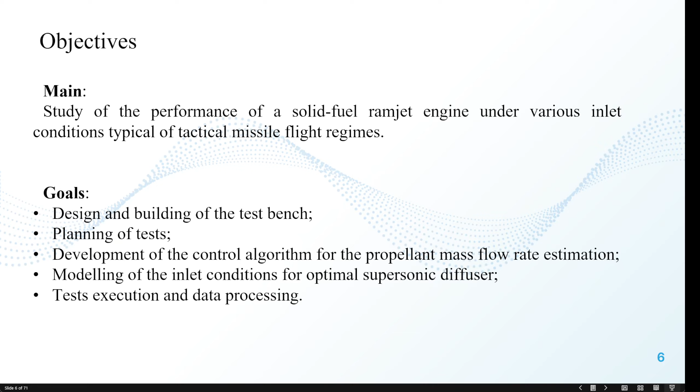Talking about methods involved in this development, we can mention analytical and experimental empirical methods of ramjet design and analysis. Empirical methods are strictly related to experimental research - these are mathematical approximations of experimental data. Analytically, we can calculate the diffuser, either an ideal diffuser or real diffuser for the engine.

Since flow must be decelerated and compressed from supersonic conditions to subsonic conditions inside the combustion chamber, we can calculate the thermodynamic cycle inside the engine analytically or by simple numerical methods. We can calculate fuel regression or fuel burning inside the combustion chamber, and we can calculate flow properties like flow modeling by methods such as area-Mach number relation or method of characteristics inside the nozzle. When we are talking about more complex processes like compressible flow, viscous flows, combustion, fluid-structure interaction, we need to involve numerical simulation - there's no other way, unfortunately, to calculate such processes.

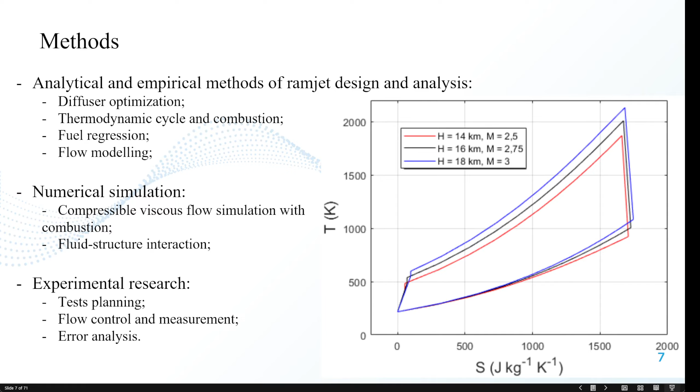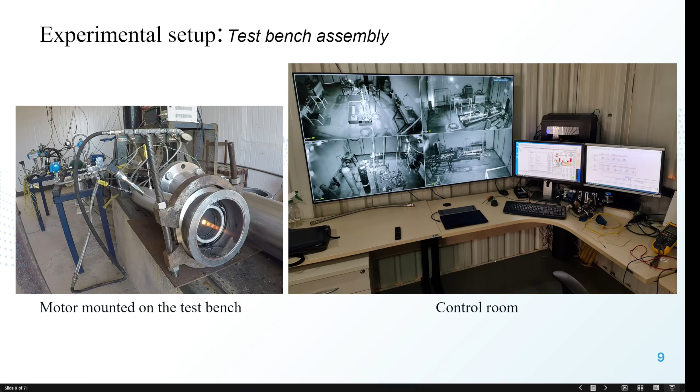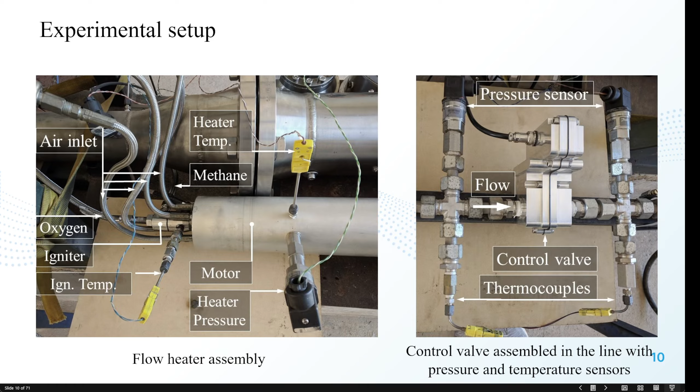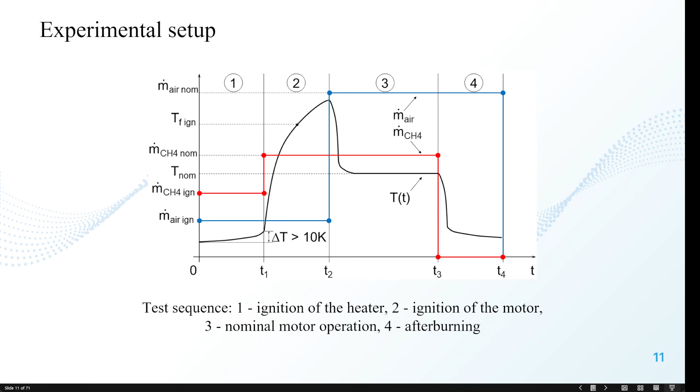I'd like to remind you that these materials I'm showing are all published in the literature, so if you're interested in some technical aspect or part of this development, I can forward you the publications on these topics.

As you can see visually, higher heating power and higher Mach result in significantly brighter flames, and fuel consumption and required thrust increase accordingly. This is because flying at higher Mach values requires much more significant thrust—kinetic energy increases with the square of Mach number, so we have to provide significantly higher thrust. Our test bench allows us to regulate mass flow rate and heating value, so we can ensure the system operates well.

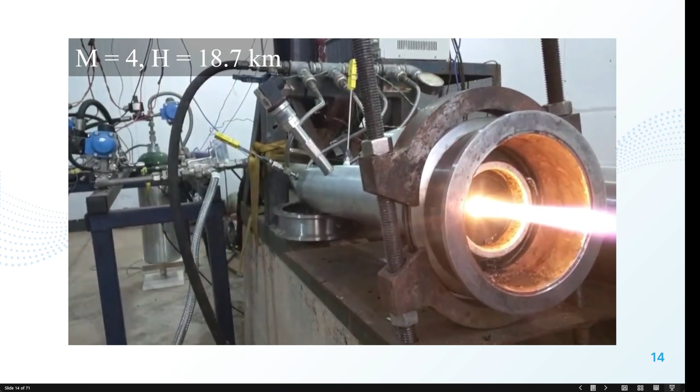Okay, this is a high power test, and as you can see, the motor was working quite interesting operation. When we provided this together with our students and colleagues, it was a lot of fun to do. This research motor is relatively small, so it allows us to change parameters fast, to adapt, and it's not that expensive to operate.

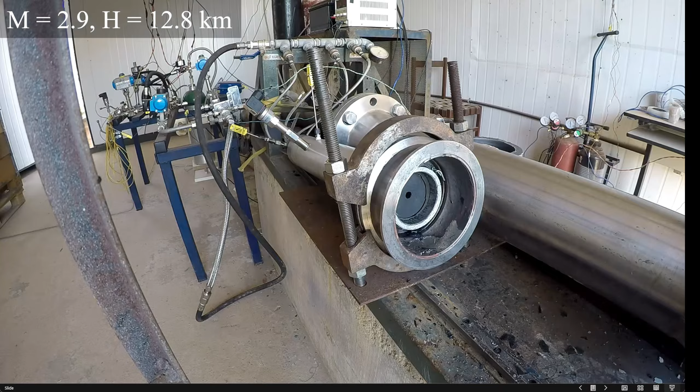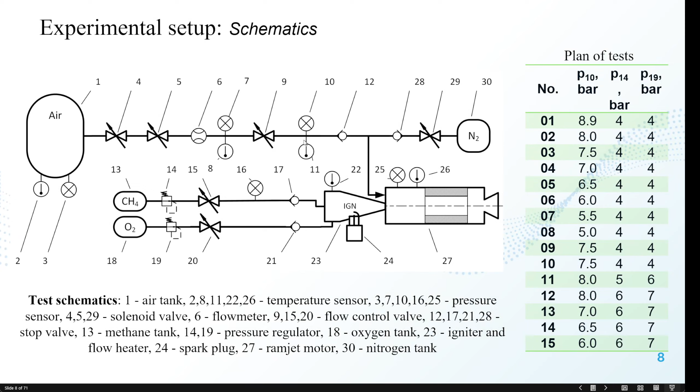As a result, we can see here some data. These are parameters on the inlet of flow in terms of pressure. Different pressures we are simulating at point 10. Just to show you where point 10 is, I think it was not really clear: point 10 is this pressure after the control valve, before the non-return valve, so this pressure which we are controlling with valve number 9.

Inside the combustion chamber, we have more or less the same pressure independent of the pressure level on the control valve, because the fuel is the same fuel grain. This means that the thermal energy provided to this combustion process is nearly the same. We are always working with excess of oxidizer, so the amount of fuel is significantly smaller than the amount of oxidizer, and fuel is...

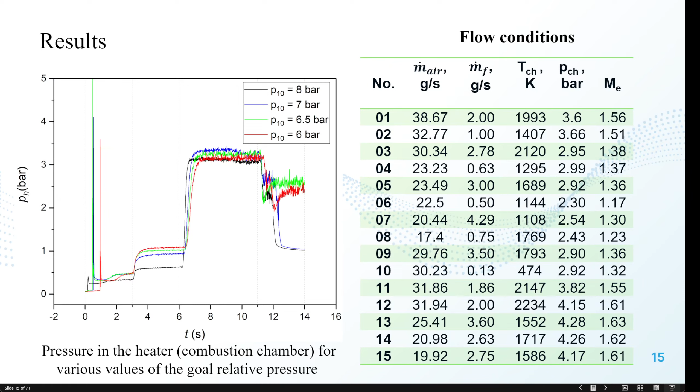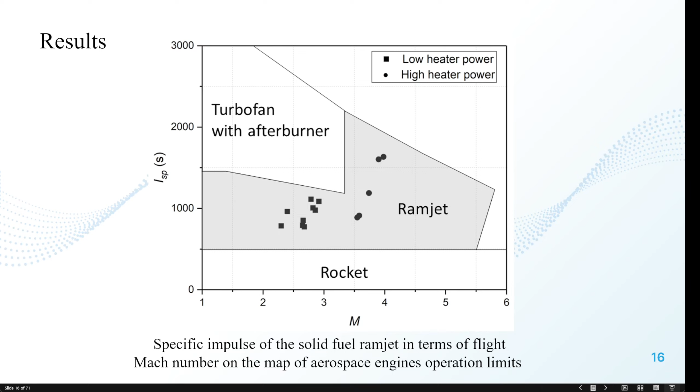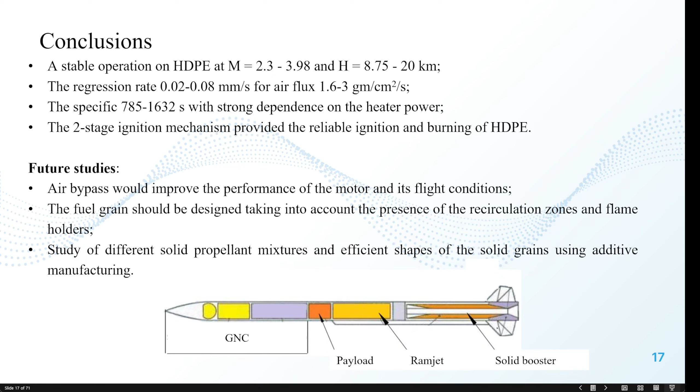Conclusions about this section are stable operation on various regimes. The regression rates were measured, the specific impulse, as you can see here for different cases, and the two-stage ignition mechanism provided reliable ignition. As the result of this part of development, we have published two really nice papers. I will show you, and if you're interested, you can find them also - they are available...

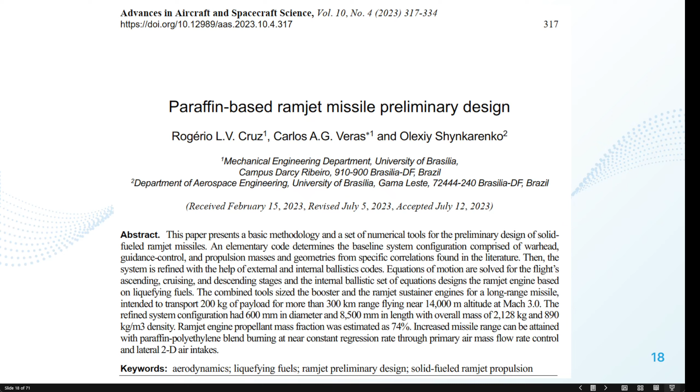...online. There is a paraffin-based ramjet missile preliminary design, which was published in Advances in Aircraft and Spacecraft Science last year. And this year, I think in November 2024, a chapter of a book was published about application development of a supersonic ramjet anti-ship missile using space standards and rocket technology. This is an extension of previous works applying our research to a real structure. So we have published the background for preliminary missile design, considering this technology of solid fuel ramjets, and I think we can quite fast provide any kind of preliminary estimation of such a device.

If you're interested in some specific aspect, I can answer your questions a bit later.

A second part of my presentation - first part of my presentation is composite 3D printed grains. I will try to pass faster through this section. This is devoted to our attempt to use 3D printing in improving the performance of the engine, in order to program its operation by using different materials along the time of engine operation.

Okay, the idea of this fuel grain was the following: that we have one surface exposed to hot flow, and the burning starts on this surface while other surfaces are protected, and they burn with time, opening more and more space for fuel burning. So with this concept, we would like to have a constant income of fuel and a constant thrust of the engine along its operation. This is quite a well-known problem, that when we are using solid fuel, especially simple geometry solid fuel like cylindrical fuel, we are constantly changing the surface of burning, and we are changing the performance characteristics, for example thrust and O/F ratio.

And with this project, we will try to keep this parameter constant using the theory of hybrid propulsion, which is quite well developed nowadays.

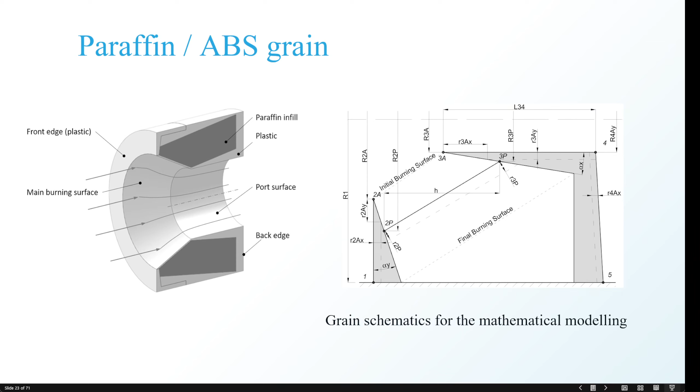We designed this fuel grain with a protection layer and tested it. According to our calculation, this fuel grain is supposed to work for around 10 seconds, burning step by step. Here you can see time and the programmed burn surface. We also did this experimentally and proved the concept. This system works, but it's not as perfect as we planned, so we will need further studies on this topic, but as an initial stage it showed quite interesting results.

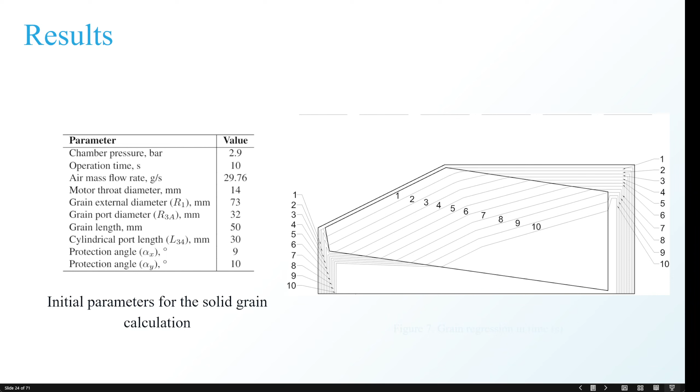It means that the amount of chemical energy provided inside the combustion chamber will stay constant, and the thrust of this engine flying at constant altitude will also remain the same.

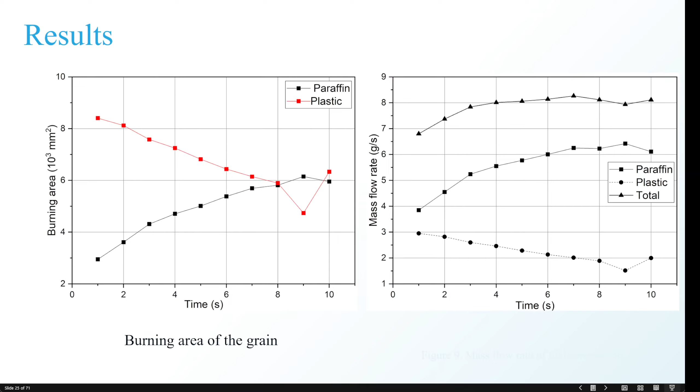We also calculated temperature inside the combustion chamber. It was something around 1060 to 1080 Kelvin, and chemical composition of combustion products over time. This is just an application of a numerical method implemented in CEA to estimate chemical composition. We did not measure this chemical composition since we have a quite reliable tool from NASA to estimate combustion. We can do it with this program.

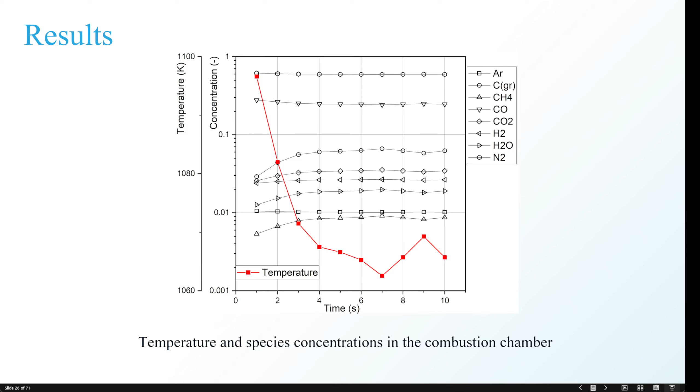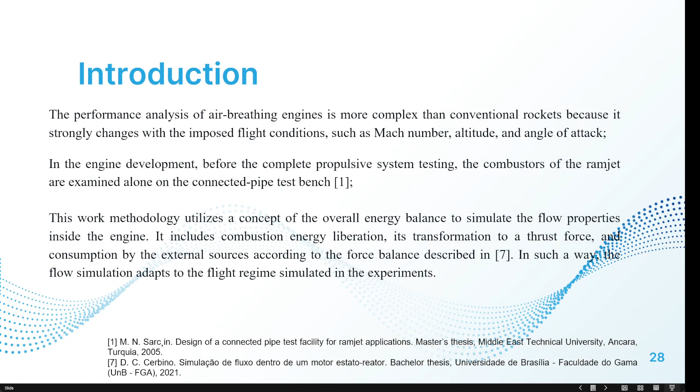Okay, the second part of my presentation is about liquid fuel ramjets. This is, I think, more important and more interesting because we have lots of results on this study. Probably I will skip the motivation. The objective of the liquid fuel ramjet was that we must have an engine working with liquid propellants.

These propellants can be stored in separate tanks, so inside the engine we will have just a combustion chamber, and we will have some simple valves, maybe a pump to supply our engine. So we can make a kind of classical ramjet engine working on liquid propellants. Of course it's a bit more complex than the solid fuel ramjet because now it has moving parts like a pump and valve, but it's not as complex as other types of engines.

So here we designed this engine for optimal conditions at 18 kilometers with Mach 3, but also since this kind of solution has to accelerate and change altitude, we also calculated two other conditions: altitudes of 14 and 16 kilometers and Mach from 2.5 to 2.75, as an acceleration or deceleration regime. We calculated these off-design conditions.

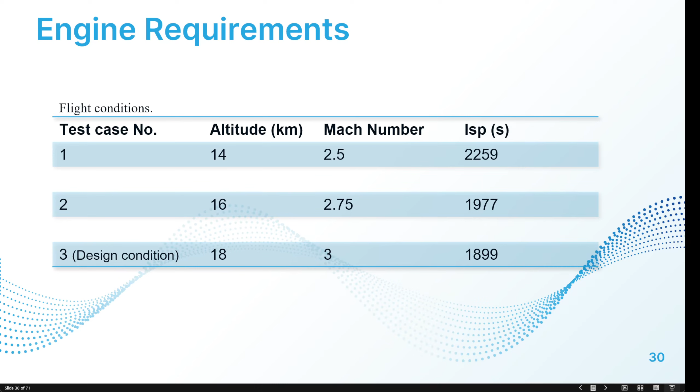The engine is the one I showed you on one of the previous slides. The test bench is a bit more complex because now it requires many more components.

We also have an air tank and a valve. This is a big control valve, quite a huge size control valve, and it's slow because of inertia problems. We are measuring parameters before and after the valve in order to provide efficient control.

We estimate the temperature of inlet conditions, and as in the previous motor, we have an igniter to ignite the whole system, but we cannot use it as a gas vitiator anymore because the power is limited. It's like 80 kilowatts, and for this kind of solution we need power of a few hundred kilowatts just to heat the air. Because of this, we are using an external tank of propane, and we have a first stage combustion chamber to heat the air.

At sensors 16 and 11, we have to reach conditions typically found after the supersonic diffuser. This engine can also operate optimally for Mach 3 and work in other regimes. Inside the combustion chamber we also have as main fuel liquid propane, and there is a flame holder, and the injection system can be shown here. It's quite a long combustion chamber for this kind of solution.

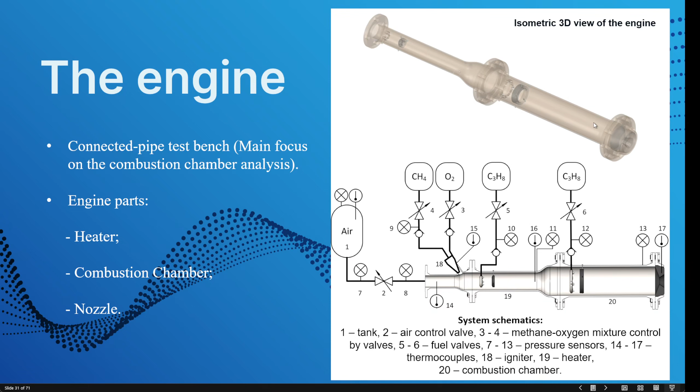The actual motor is two times longer, so this is just a half size. The complete size of the engine you can see at the top of this slide.

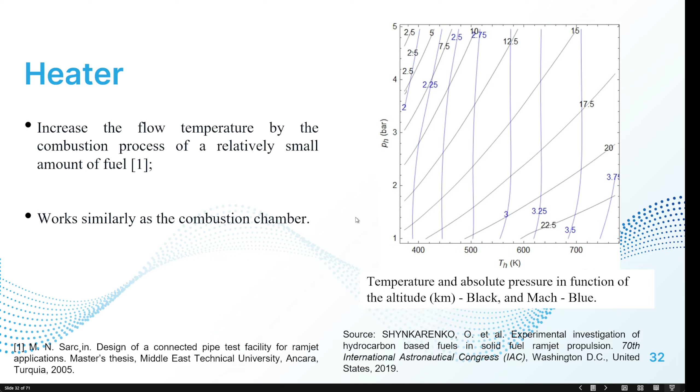We developed a diagram relating temperature and pressure inside the heater with respect to the desired Mach conditions and altitude. This was also published in IAC 2019, one of our publications, and we published it in other publications as well, especially last year when we did something similar.

Also, the combustion chamber of the heater is shown here. The idea is that our flow will reach temperatures required to, and equivalent to, a real diffuser, and at the same time it will not harm or burn the surface of the engine. So we have a flame holder inside which is preventing this harm of hot gas on the surface.

So flow is separated into two regions. The internal region will maintain hot gas and flame. The flame holder will ensure that the flame will not extinguish with the high velocity of flow. And this gap here prevents overheating of the wall. So cold flow, as you will see by our simulations, is passing on the surface of the wall, and this wall temperature is not exceeding the limit for the material.

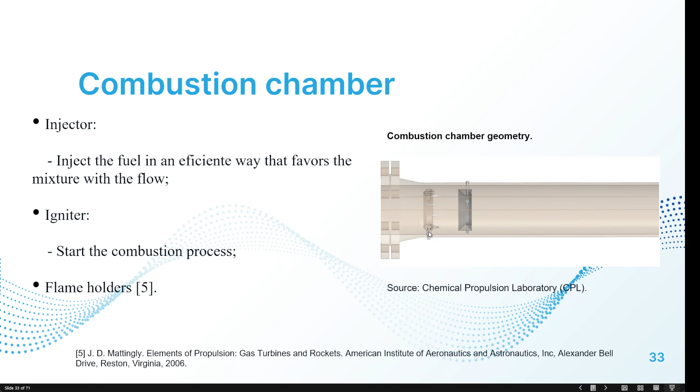The engine is made of stainless steel. The flame holder is made of high quality graphite. And the injectors are also, I think, some heat resistant alloy of stainless steel.

Talking about flame holding, it's extremely important. There are many patents that you can find on the internet. The idea is that you are creating a recirculation zone inside the flame holder. So after injection, or it can be combined with injection, you can organize this recirculation pattern inside the combustion chamber, which will hold the vortex and the hot gas inside this vortex, keeping the flame on the desired position inside the combustion chamber.

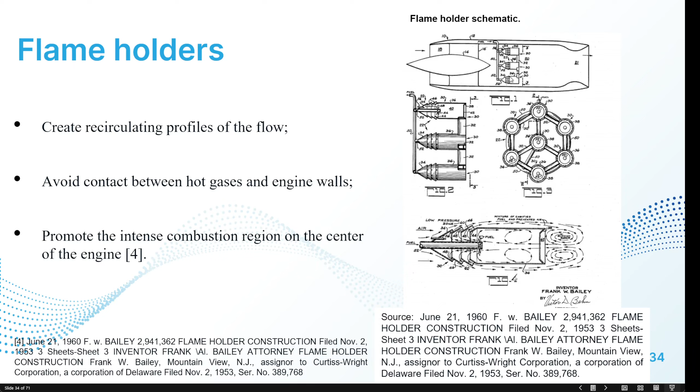If you don't have this flame holder, this flame will go out because of high velocity inside the engine, which is higher than combustion velocity, and this flame will be extinguished. So a flame holder is a must-have inside the combustion chamber in order to hold the flame in the required position.

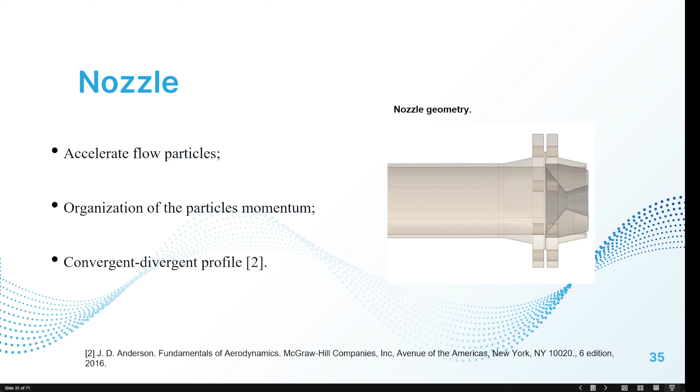The nozzle of this engine is a quite classical nozzle. Also, the nozzle insert is made of high-quality graphite, and this is quite a good material for laboratory testing or laboratory application. Of course, for a flight model it's not that good because it's heavy, like a block of graphite. But as we know, in real applications, you can use other materials for the nozzle.

At that time when we made this simulation, I think it was maybe 4 or 5 years ago, we had limits of ANSYS. We did not have full use of the ANSYS license as we have now. We had a limit: ANSYS just gave us at most 512 thousand elements for the student or academic license. And computers were not that powerful at that time.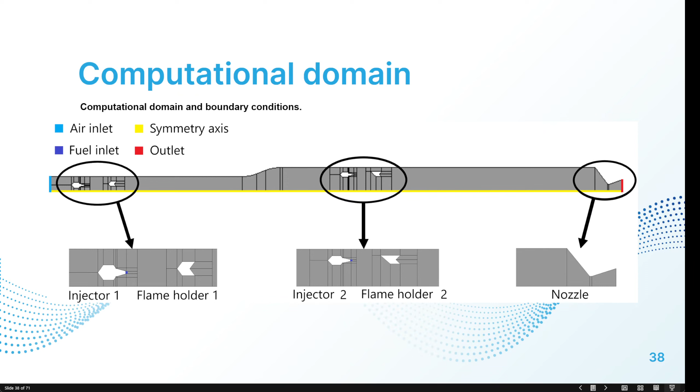So it was quite important to choose the number of elements and to make a mesh sensitivity analysis. Another aspect we had to consider is that the motor is really long, and when you have a long computational domain, reflections of waves inside the combustion chamber and inside the heater go in one direction, then return back to the heater and impact the boundary conditions. So the stabilization of the computational process is also really long - we are talking about days. Even on this simple mesh of 512,000 elements, flow stabilization can take several days.

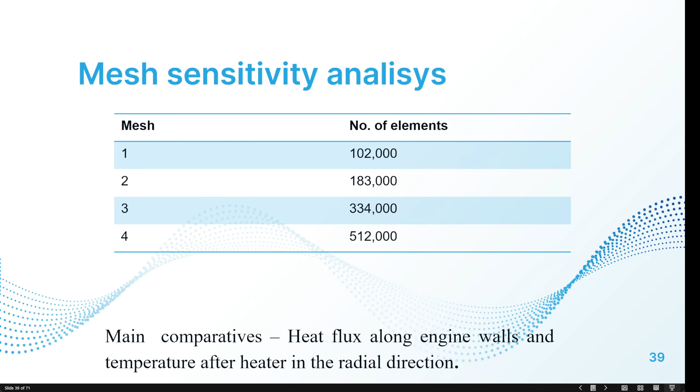These are examples of meshes: mesh 1, 2, 3, and 4. You can see the structured mesh, which is following the idea which I explained to you before.

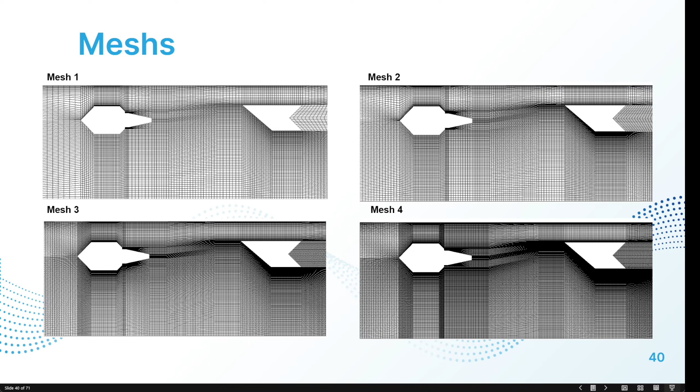As the main criteria for choosing the mesh, we analyzed the heat flux on the wall, which was the most interesting parameter for us to answer the question of whether the engine will burn or it will survive. So we tested with different meshes, looking, and there is some difference.

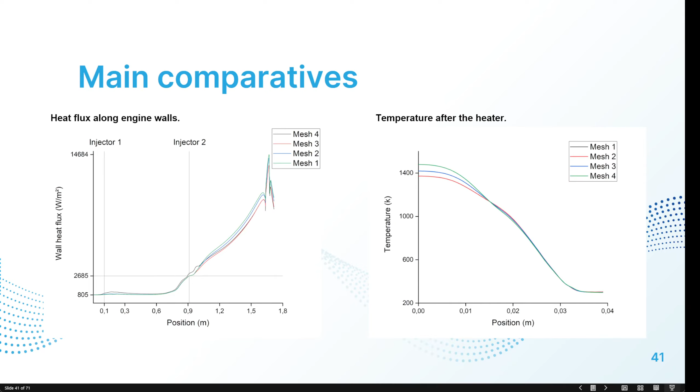We chose, I think, mesh 2 or mesh 3. We didn't choose mesh 4 at that time because stabilization was really, really long, and the results are almost the same. So I think we chose mesh 3 for the simulations.

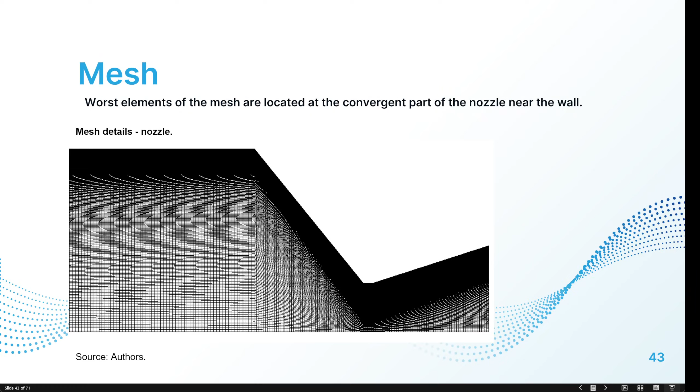Okay, let me pass this mesh on the nozzle, mesh on the heater. The mesh quality is okay.

For this setup, for this simulation, we used predefined fixed boundary conditions. We used the K-epsilon realizable model for turbulence, and radiation treatment for surface boundary conditions. Non-premixed combustion was used for chemical transformations, with a specific model called GRI-Mech 3, which is well-developed and well-known for hydrocarbon combustion, mostly for air-methane, but it also works with air-propane and some light hydrocarbons, and it was completely suitable.

Unfortunately, at that time we did not use any kind of two-phase model. The multi-phase model is extremely complex. Even nowadays it's really hard to couple this multi-phase model with combustion and compressible flow. So at that time we used just gas injection as fuel.

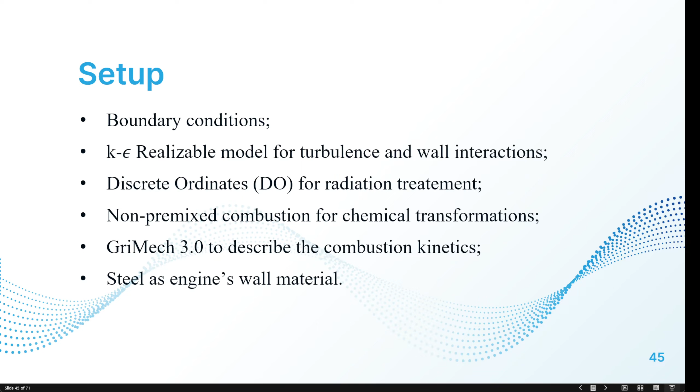Some details on the method of solution: it's mostly a second order scheme, but for some parameters we used a first order scheme because it was not really stable.

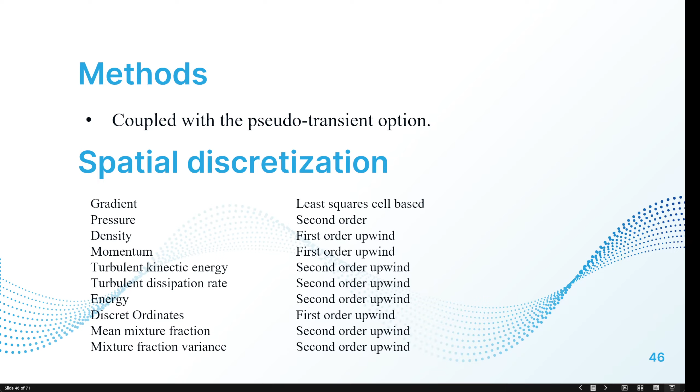Results comparison between simulation and calculation show a really small difference. Deviation between calculated and simulated temperature was less than 5% at most, in the heater and in the combustion chamber, which is quite acceptable. So we can prove that our simulation was more or less good because it fits well with the NASA results.

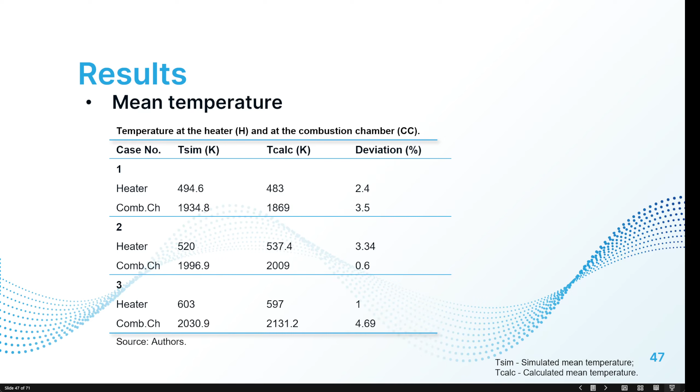These are the results of simulation showing the distribution of temperature for different cases. These are the 3 cases I talked about. Case number 3 is the design condition, and cases 1 and 2 are off-design conditions.

We can see that temperature is concentrated in the center of the combustion chamber, and on the surface it's still lower than the critical temperature for the wall.

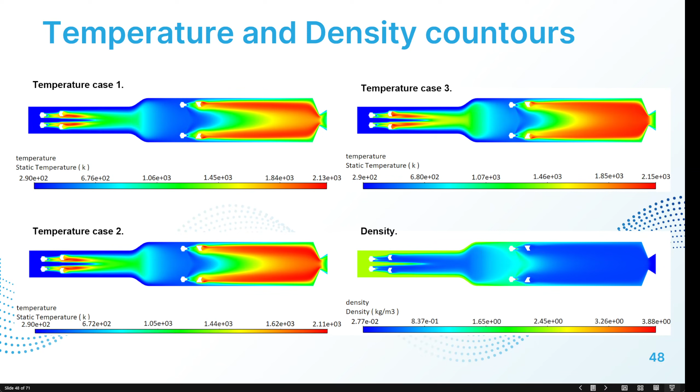Another work we have done, which unfortunately I cannot show you today, maybe next time, is a simulation of the complete problem, combustion and heat transfer together. There we show that the system has to survive the test. So this numerical experiment shows us a very important outcome: that our system will sustain the test, so we can go to practical implementation and practical testing of this engine.

This is typical for bidimensional simulation. After we provided a 3-dimensional simulation for this case, which maybe one day I'll show you, it's significantly more demanding on computational means. It also shows a recirculation zone in the center, in the beginning of the combustion chamber, but it's not as bad as it looks in the bidimensional simulation.

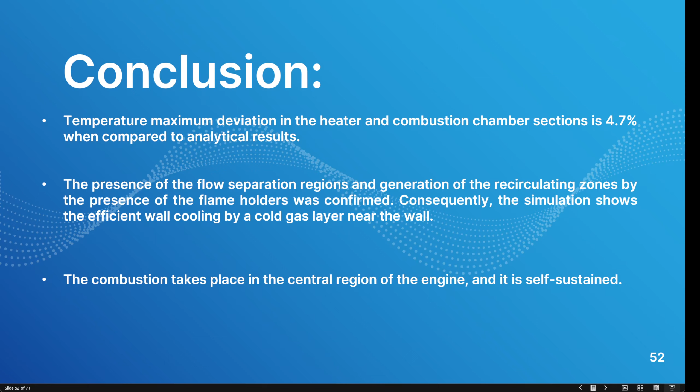As conclusions, we see that deviation of results is less than 5% compared to analytical results. Flow separation regions are keeping the flame, and combustion takes place in the central region of the engine, which we planned to have. The last part of this liquid fuel ramjet presentation is the test bench control.

I think our time is quite limited, so I don't know if we continue with this presentation today, or we can pass it to the next time, because I think this part is extremely important. Just let me know if we have time and we can continue. Yeah. So, Alexey, thank you. Let me know if we can continue or we are out of time. It's up to you, because I don't know about your time.

Okay, so let's do the following. Since I already told you that we simulated this engine, next time I will explain how we plan the experiment for this engine, as a teaser for the next part. The problem was: we simulated this engine, but how in practice can we have correspondence between the test bench on the ground and flight conditions, and how can we show and prove that the test we are making on the test bench corresponds to flight conditions?

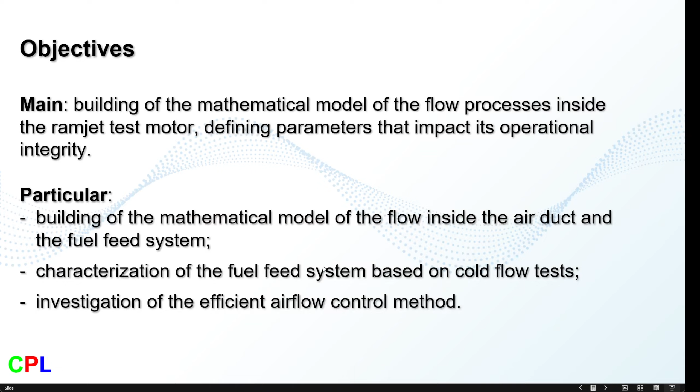This one? Yeah, what was the reason? Because I know that sometimes we try to find some circulation to perform for cooling process, such as air packs, but maybe you have some explanation of the reason.

Yeah, first of all, we must have circulation on the flame holder. So when we have a flame holder, the main goal is to have circulation. These recirculations are quite welcome because they help us keep the flame.

When we are talking about the central bubble, this was also a surprise. I think it happens because of high velocity flow passing through the expansion of the area, and because of flow deviation, velocity deviation, this process of circulation happens.

I will tell you that this is maybe also a numerical result, because in three-dimensional simulation, this recirculation has a different shape. So I would like to test it, and maybe you understand that to test this bubble in a real ramjet is not that easy. You cannot just open it and see if there is circulation or not.

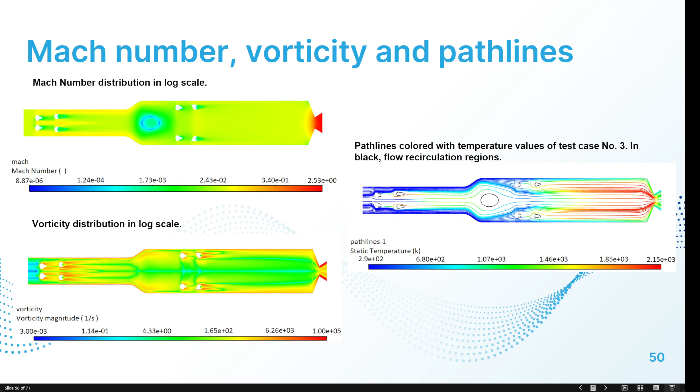But I think we can find some kind of indicator to test this. I think this bubble is just because our structure is not perfect. The structure is not perfect.

So the section of flow expansion, as you can find, where I think this picture is better - it's still shrunk, but I hope you understand that this motor is 2 times longer. It's not that short as it's shown here. And it's not perfect, the shape is not perfect.

What is this shape? This is a transition between, I think, a 3-inch pipe to a 5-inch pipe, a standard transition you can buy on the market. And since this shape is not perfect, this circulation is happening.

But I'm not worrying so much about that because it happens way earlier before fuel injection. So when we inject fuel, I hope at that time the flow will normalize and stabilize at that section.

What can be done to prevent this kind of recirculation is a flow straightener. So at this junction between the heater and combustion chamber, we can put a flow straightener, which are pipes or meshes, which will mitigate such kind of recirculation.

I think this is a viable solution to solve the problem if it affects performance of the engine. Until now, I did not see any kind of problem, but let's see in the future if we must prevent this. I think a flow straightener is a good option to prevent such a problem.

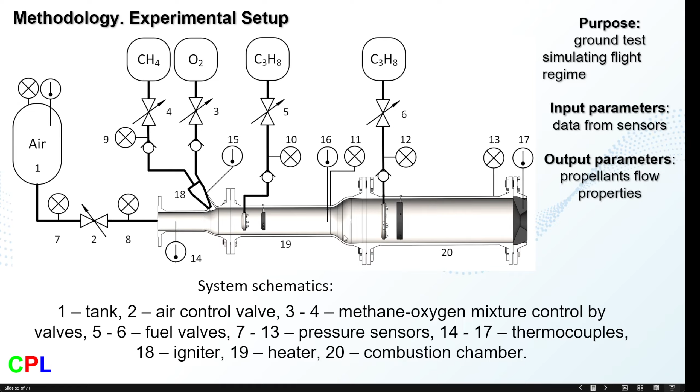These problems are typically solved quite well. Let me show you the first slides of my presentation, if we are okay, it was a long presentation. Okay, this, for example, the Talos missile.

I think it's one of the most perfect engines for me, one of the best. It uses a flame holder like a mesh flame holder, and also it uses a bypass of cold air to cool down the structure. But one disadvantage of this solution also always exists.

I think two disadvantages. Disadvantage number one is you have to have access to special materials, which in Brazil is very difficult.

We could not make this design of flame holder I was thinking of first, because of restrictions in the use of advanced materials. And the second issue is access to materials and technology, which we also don't have. So in our application, in our engine, this flame holder made of graphite was a compromise between what we have and what we can realize from a technological point of view. I think this is the most challenging problem of this project: we have to keep the flame where it has to be, and it should not damage the engine.